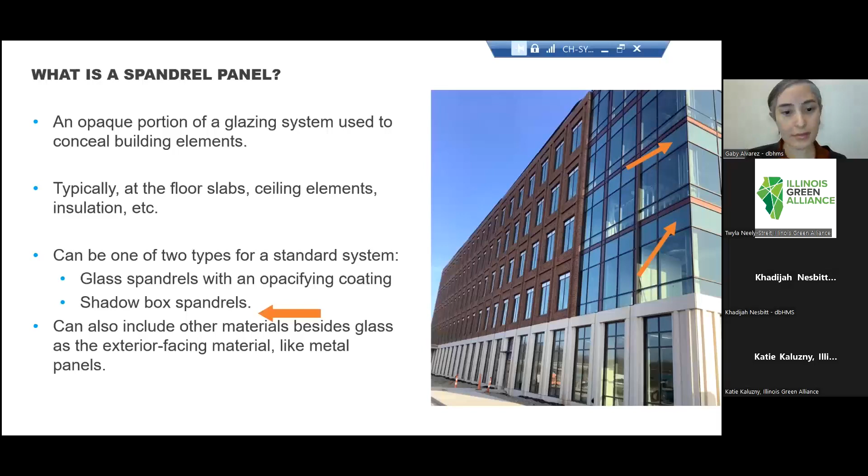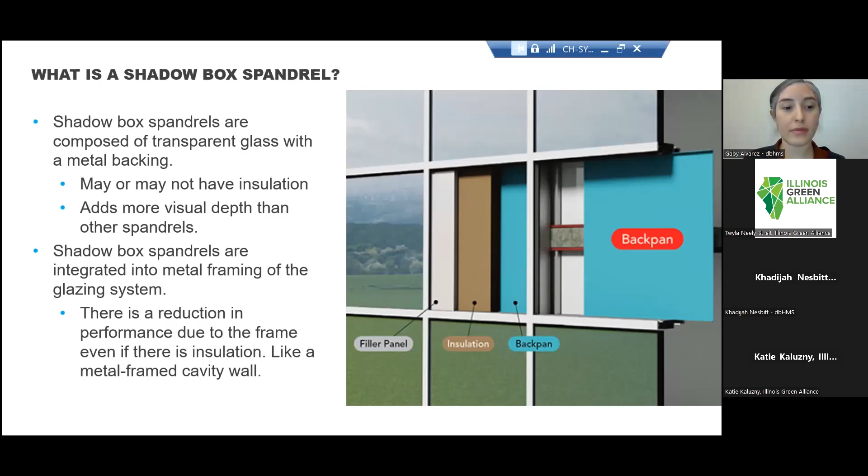In terms of a shadow box spandrel, shadow box spandrels are composed primarily of a transparent glass with a metal backing. They may or may not have insulation, and it allows more visual depth than other types of spandrel panels. Shadow box spandrels are integrated into the metal framing of the glazing system. So they have the same reduction of performance due to the frame, even if there's insulation, similar to a metal framed cavity wall.

And now we'll talk about what's the issue with spandrel panels and code compliance. First of all, we will be talking about the 2022 Chicago Energy Transformation Code for commercial buildings. So here in the image, you can see the different paths for code compliance, and we will be talking about ASHRAE 90.1 Energy Cost Budget. This is a performance path that uses simulation software to calculate the whole building annual energy cost. This we will call proposed, and that is relative to a simulated code minimum building that we will be calling

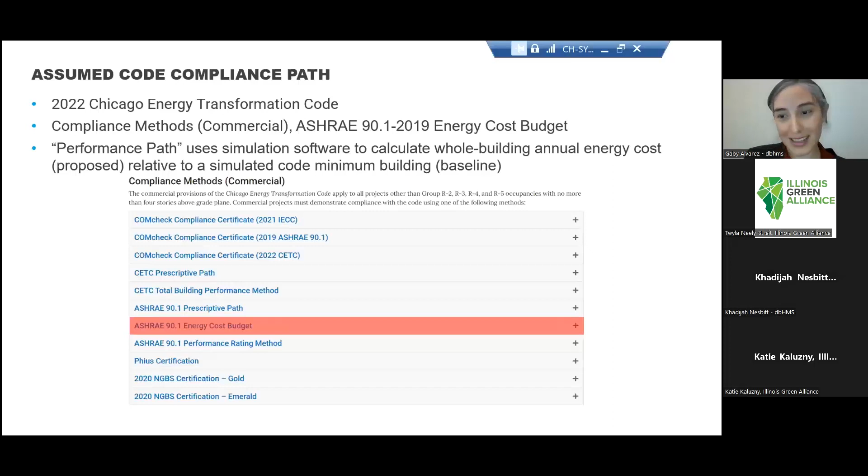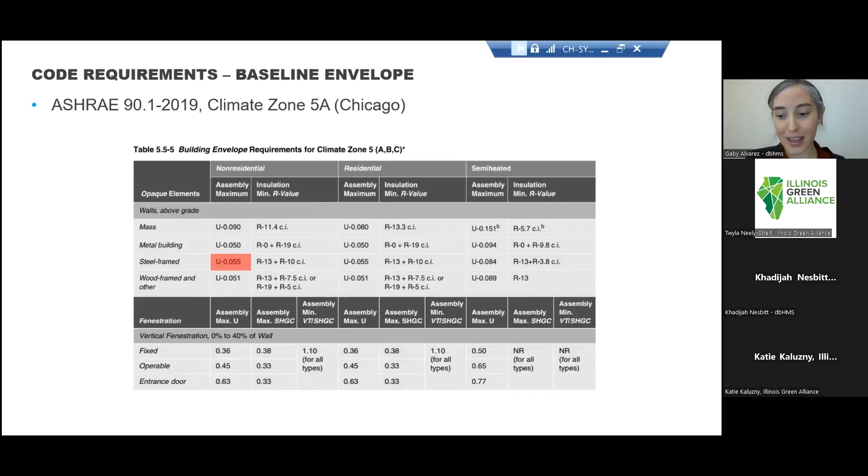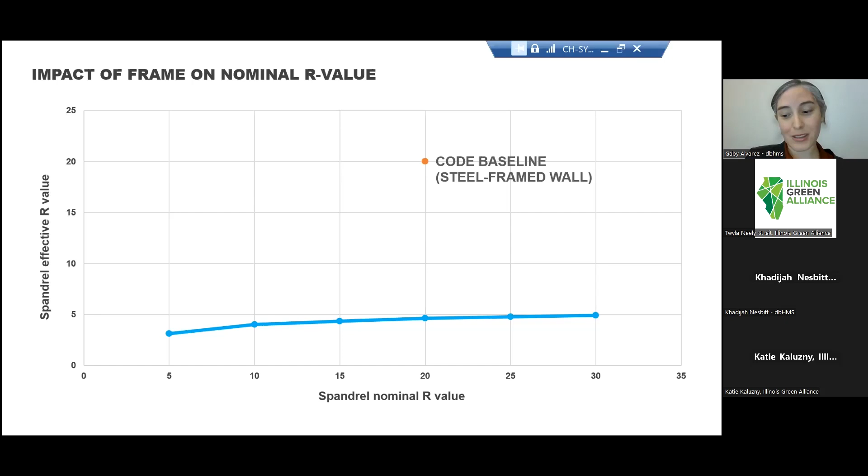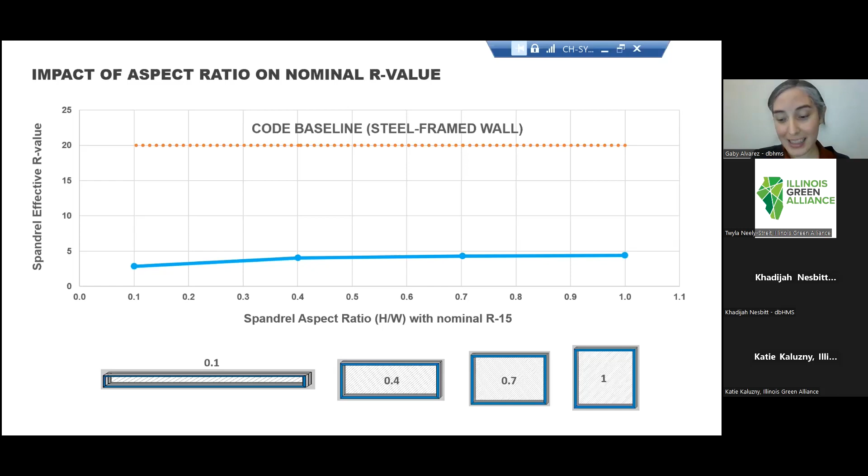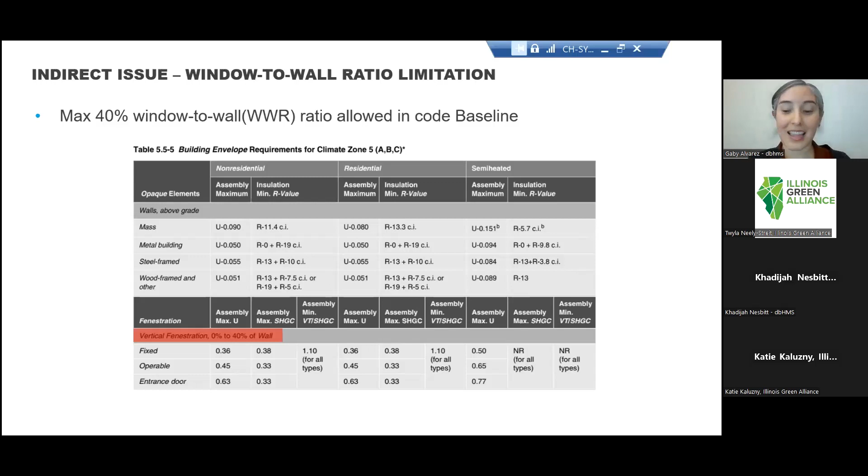Adding to all of this, there's also an indirect issue with the window to wall ratio. Here we can see that code allows up to a 40% window to wall ratio. The window to wall ratio is the portion of the building envelope that is constituted by windows. So if we have a window to wall ratio of 40, this is the part of the envelope that is made up of windows. And this is important because when we are doing curtain walls with spandrel panels, we probably have a window to wall ratio greater than 40%.

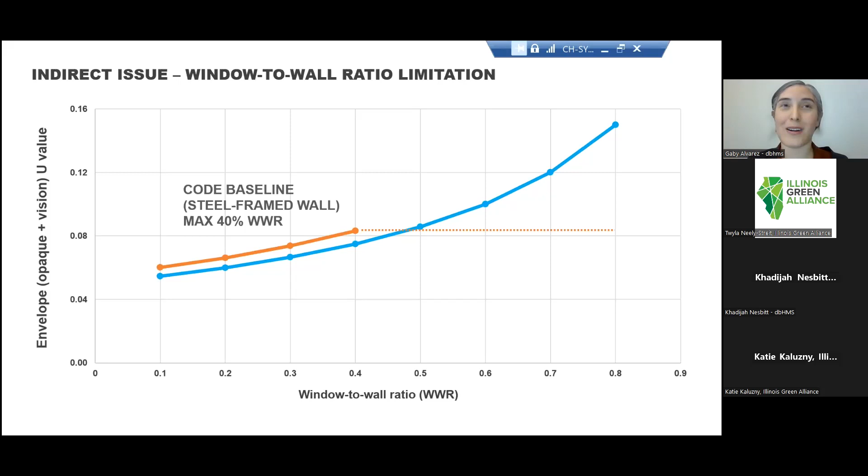This blue line represents our proposed building, and we could be increasing our window to wall ratio as we want in our building. And we'll see the code baseline is also increasing its window to wall ratio, but only up to 40%. On the y-axis, we have the envelope U value, the U value of the whole envelope, taking into account the opaque part and the vision. And we can see that even if we have better performance in our proposed, as we increase the window to wall ratio, we will have to compare it with the baseline and do better than the baseline. This is going to be hard when we are increasing the window to wall ratio even up to 80%. And these are all the challenges we have to face trying to comply.

Now we'll talk a little bit about what are the challenges in design that we've encountered.

This is an office building in Chicago, and this is a window submittal from the contractor, and we were having trouble defining the values. We were very lucky to have input from the contractor since the beginning, because we usually don't. This is something that at the very early stage of design, we don't know the impact the spandrel panel will have on our building. So even though we had this input...

I'll explain a little bit of this chart. We have the area of the vision and the area of the spandrel, and we have a base system, and then we have this same base system but adding 3 inches of continuous insulation. So we have the same area, this is for a curtain wall, so we have the vision and the spandrel and the overall, and then we have the U factor for the vision, the spandrel, and the overall.

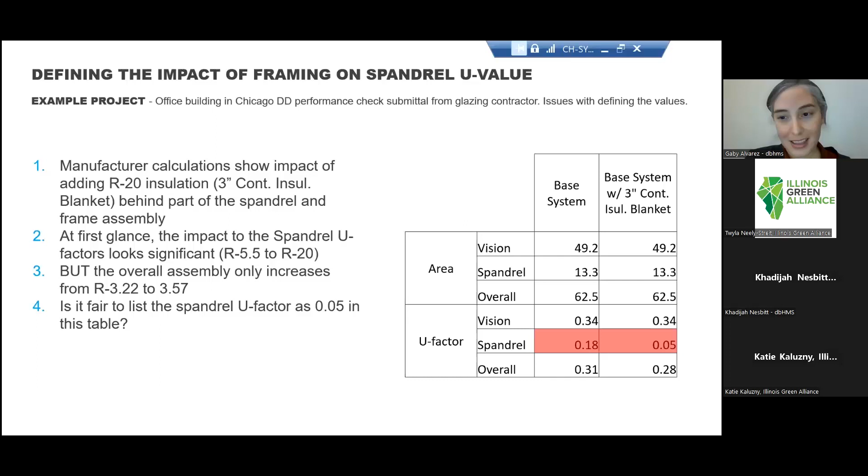We also wanted to talk about another project, totally different, and this is another point we wanted to make. This is a mixed use development, and we wanted to show the impact of the curtain wall system using the performance path, and the impact it has on the whole energy model. This is the whole building.

I'll explain a little bit of this graph because I know it has so many things in it. The second bar, on the left, is our baseline, and we're comparing the energy cost budget for the whole building. The red dotted line is our baseline - we have to do better than this. All the other bars are our proposed building, but we're simulating and changing some properties of the envelope.

This is also a building that had a lot of curtain wall, so a lot of windows. What we can change is the window to wall ratio, the solar heat gain coefficient, and the U value. We did all of these options, and we could see that overall, we are performing better than the baseline, performing better than code. All these colors are the different components of the building - we have cooling, lighting, heating. But at the end, we're passing code because we can take into account the whole building.

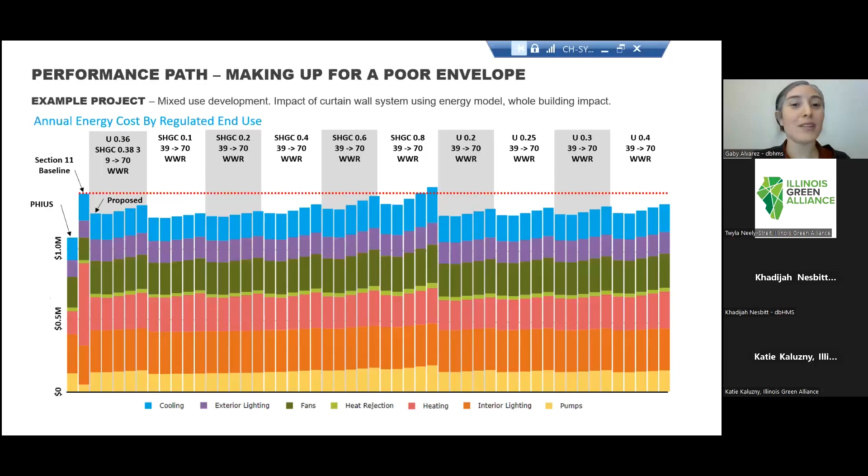But what happens if we take a closer look at how our building is performing, how our envelope is even performing? In this graph, you'll see the same baseline at the left, the second bar, and the different runs are the same. We have a dotted line on the positive and another on the negative. The positive is heat addition, and the negative is heat removal.

So at the end, taking a closer look, all these proposed options are even worse than baseline when we look at the loads on the envelope and the building. We're looking at equipment, infiltration, lights, people, and the loads from the envelope and the windows. We could see that most of it is doing worse in the envelope.

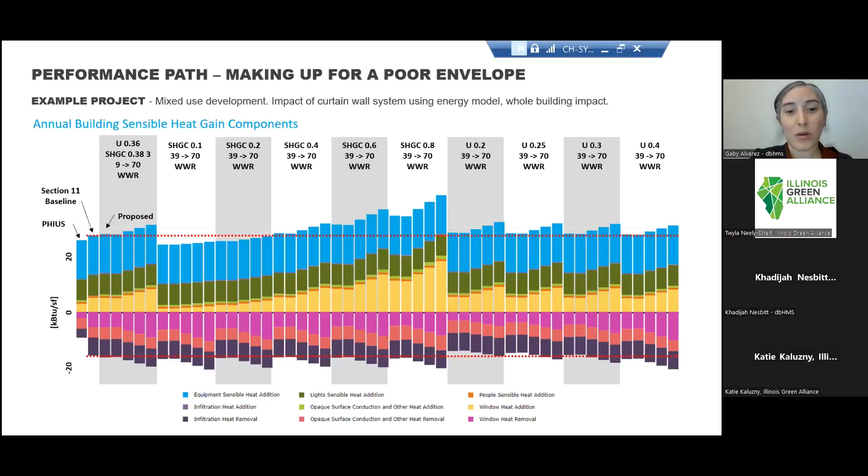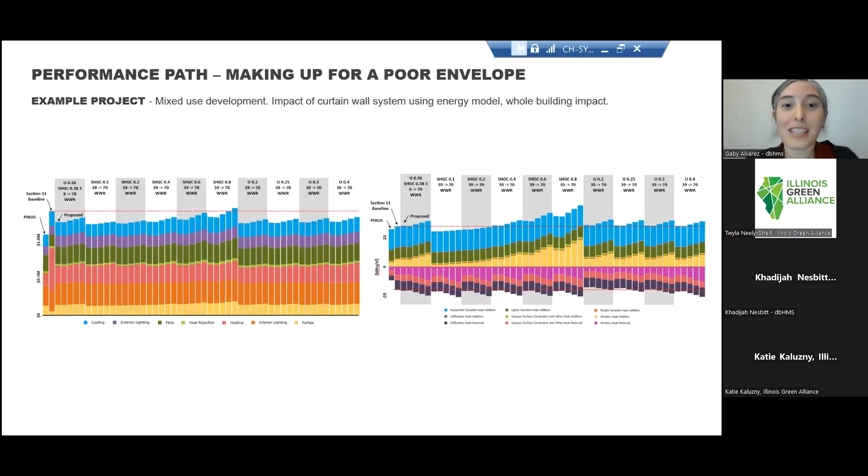So at the end, we wanted to say, okay, we're passing code, that's good, and we have great systems. But do we want to take a closer look at our envelopes, at what they're doing to the performance of the building? Really take a look at it, knowing that we can do better than what we are doing.

So we were asking the question: when you isolate and just look at the envelope performance, what happens, what can we do, and how does this impact the overall project?

We start looking at some of the design impacts for spandrel panels during construction. The idea is to get the optimal performance out of the spandrel panels, highlighting the struggles of getting that R20 that would be necessary. How the spandrel panels are designed and installed is key. If we want them to perform as well as they can, we need to make sure we're installing and designing them properly.

Some of the issues we're trying to prevent start with condensation. When it comes to spandrel panels, we get condensation when warm air bypasses the back pan of the spandrel panel and enters the shadow box. Then that interior glass surface reaches the dew point and causes condensation.

The condensation will be visible on the exterior, but it can also cause damage and staining, especially if we have issues with weakening seals, moisture getting in between each surface of the insulating glazing unit. Sometimes this moisture that gets into our spandrel panels on the interior, we see it and think there's a leak somewhere in the installation or the whole system, when really it's the condensation produced from the spandrel panels or the curtain wall system itself.

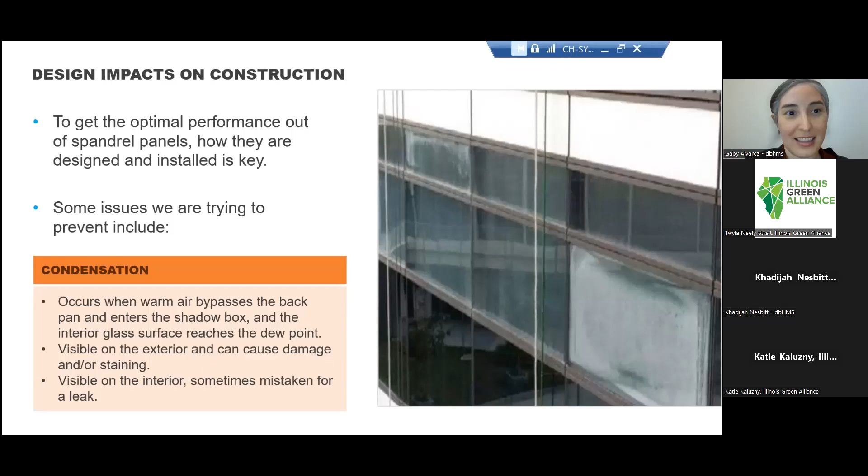Another thing that we're looking at are hotspots.

Uneven heat distribution across the glass can create uneven stress distribution, giving us hotspots. Where we have these uneven stresses, it can cause glass breakage and damage to our coatings, such as low E coatings. There are also pressure and temperature differential issues handled by the curtain wall manufacturer and glazing supplier that do impact the system and need to be considered when developing our spandrel panels.

In general, when we're doing construction, there's going to be debris, dust, materials, and spills that happen during construction projects, and these can contaminate or accumulate on the interior spandrel surface. Once the building is getting ready to be turned over and we're trying to button everything up for substantial completion, we're seeing all this construction dirt on the interior of our spandrel panel, and now it's visible on the exterior. These chemicals can damage the glass and be difficult to clean without causing further damage. This creates an aesthetic concern.

Because of how the spandrel panels are installed, you have glazing lubricants that can be left behind in the spandrel panel that are not properly removed and leave deposits. Any sealants or paints within the shadow box contain volatiles that can be released because of the solar gain that happens within the spandrel panels. It's extremely warm in there, and it can exceed 140 to 160 degrees Fahrenheit. So these volatiles can condense on the glass and cause additional damage and aesthetic issues.

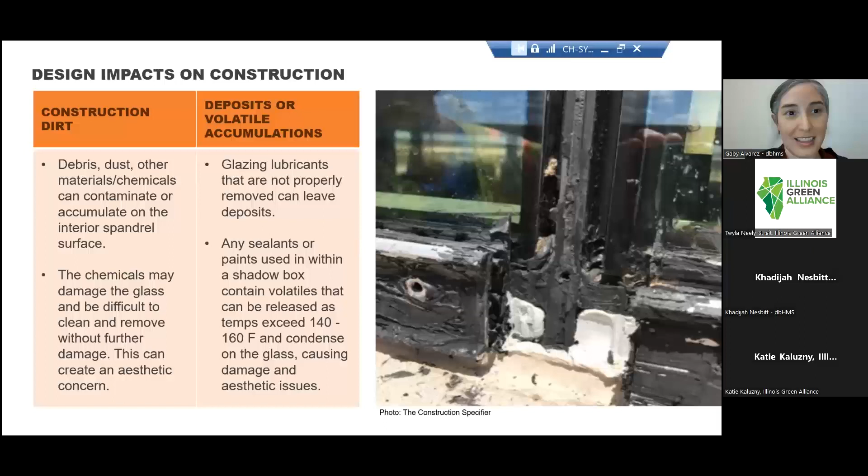There's a lot of different factors we have to consider with spandrel panels, especially because of how they're constructed, and we need to make considerations prior to and during the design phase, and then also once we're out on the construction site.

Some of these items we're concerned about can be addressed during the design phase. There will be spandrel panels, shadow box spandrels, called out in the design, but they're not shown as being sealed vapor tight. Having these notes in your drawings and specifications, and pinpointing that importance when they're installing the spandrel panels, is one way to help address these from the design side.

There's also a way to design shadow boxes with vented air cavities to prevent condensation from occurring within the shadow box. When it comes to the glazing, use heat strengthened glass for the exterior light of the insulating glazing unit, and tempered glass for the interior light to reduce breakage due to thermal stress. The overall makeup of the insulating glazing unit, the spandrel, and the installation on site all have an impact on the performance of the spandrel. It's all tied together in order for us to get a system that works properly for the life of the building.

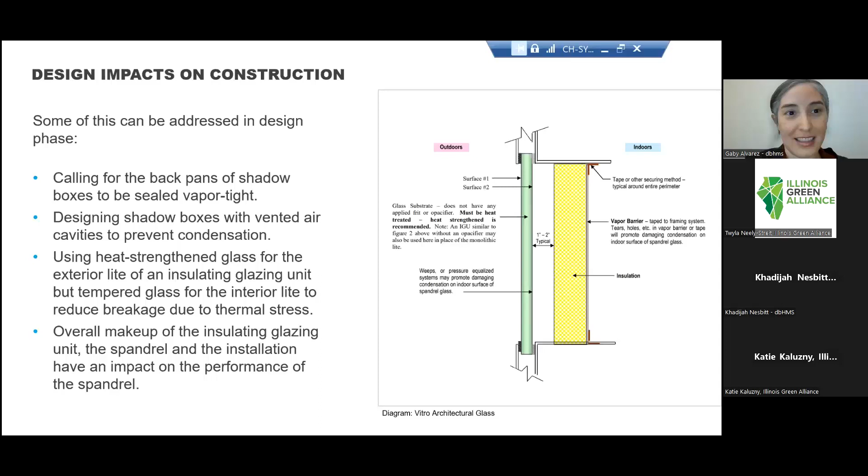Shadow boxes also need to be sealed properly to maintain the air and vapor control layers. They're part of the primary air and vapor control areas of the building, so we have to treat them in that same exact way and make sure we're sealing them properly.

A lot of times, the insulation used for spandrel panels is foil-back insulation, and it's taped and sealed at the back panel on the back side of the spandrel panel. How these are installed is very important—there shouldn't be tears or rips that would allow warm air to bypass the metal back panel of the spandrel panel. We have to treat spandrel panels as part of the air and vapor control layers, just like we make it a serious issue to maintain continuity for the building and the enclosure in general. We want to include the spandrel panels in that and not consider them as separate or isolated.

I'll say that this detail you see here to the right is an anchored detail, but there will also have to be considerations for any spandrel panels at moving conditions. So the design has to take into account any movement as well. It's not a one size fits all—of course, everything is project specific, but we have to make different considerations as it relates to maintaining the air vapor barrier control layers, especially when I have moving conditions.

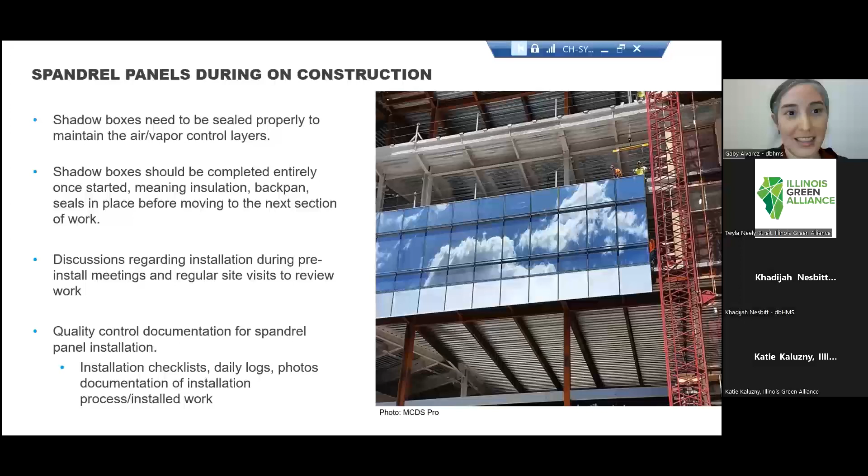Along with this, regular site visits to review how the installation is taking place and what we're seeing, even before the building is finished, help catch any issues. Site visits are performed by the architects themselves, but also by building enclosure commissioning providers and building enclosure consultants, having regular site visits to see the progression of installation, making sure it's matching the contract documents and calling out issues, as another way to combat some of the challenges we have with spandrel panels during construction.

And now, what are some solutions? First of all, be very, very clear.

Be very clear about the need to account for the frame. This is, I feel, very important. Spandrel panels have frames, and we have to take them into account in our calculations.

Also, a high recommendation is to follow the NFRC 100 and the NFRC simulation manual. I'm not an expert on this, but we do have experts at our firm, and there are many experts in the field. Let's call on them, let's bring them on, let's have them help us find the correct value for our spandrel panels.

Also, underscore the impact of the window-to-wall ratio on performance. Spandrel panels are usually part of a curtain wall system, and increasing the window-to-wall ratio of our buildings has a high impact on our performance when we look closer at it.

Also, call out the assumptions in any target value shared with the client and the design team. What are the assumptions we are taking? Where are these values taken from? And very importantly, having these conversations gets us closer to a solution.

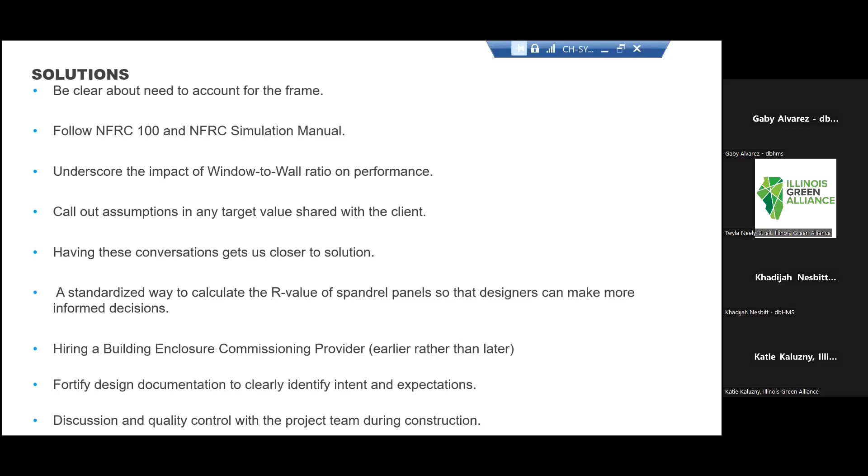I can speak to these, but also to add, having these conversations gets us closer to a solution. The point of the presentation is not to say there's a 100% solution currently. It's that this is something we're talking about, that has become a difficulty factor. The challenges have been known, but a lot of times because we can get the building to fall under code, or get the building to work and move forward with the project, we don't get a chance to stop and really look at what we can do to calculate the value of spandrel panels, and really understand the impact that an insulated or non-insulated spandrel panel will have on the building.

So that's really just to add to what she's already said about the design. This process of going through and figuring out how we can better approach this is what starting these conversations will help us do, because there's not a set answer and we don't have all the calculators established yet. But the more we talk about it being an issue, the more we can move toward that, instead of just pushing through and saying it's fine because we're still able to move forward on projects.

But another thing is, from the construction side, hiring a building enclosure commissioning provider earlier rather than later. A lot of people think commissioning providers just come at the end to see how the work is installed. But a commissioning provider is really there for the life of the building, from start until end, and even after substantial completion and turnover.

Having a chance to have a commissioning provider that can help provide recommendations, suggestions, and point things out, and be a second pair of eyes for the project team during your design phase, during your specifications, and during the drawing phases, to construction document phases, to be able to kind of highlight and start these discussions, and also help to articulate some of the challenges and the why we need to be paying attention to these items.

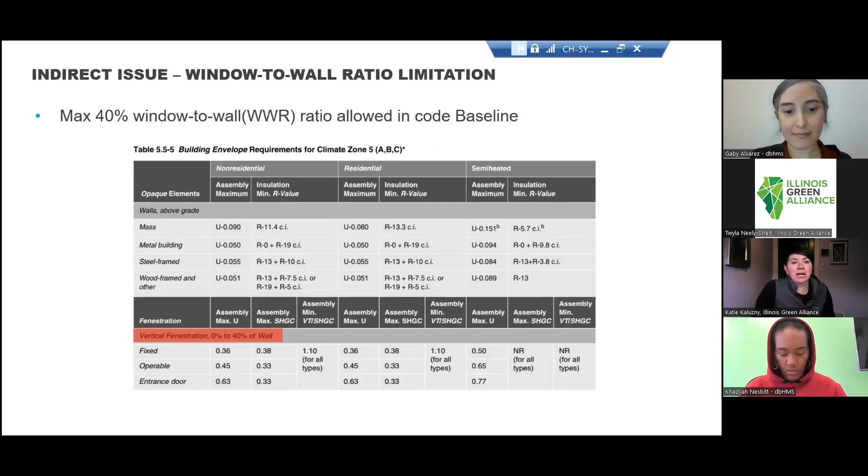Stan, if you have a follow-up to that question, feel free to add it to the chat or to the Q&A, and we'll make sure that we dig into that further if you need more. I have a question from Lauren, a couple actually. One asking about the window to wall ratio plot. So if you want to go back to that slide too, what do the orange and blue lines represent?

Yeah, thank you. I feel like maybe a little explanation here would have been better, but the blue line, that's our proposed. That's the building that we are designing, and the orange line, that's the baseline from code. When we're using this path of compliance, we have to do better than the baseline, and as we could have any window to wall ratio, we'll be comparing it to the same window to wall ratio in the baseline.

But when we get to 40%, if we go beyond 40% window to wall ratio for our building, we will always have to compare it against a 40% window to wall ratio. For the baseline, that's the maximum window to wall ratio. And this is where it hurts us trying to get better performance than code, because you see the blue line, the U value of the envelope will continue increasing, right? So this will be very hard to meet.

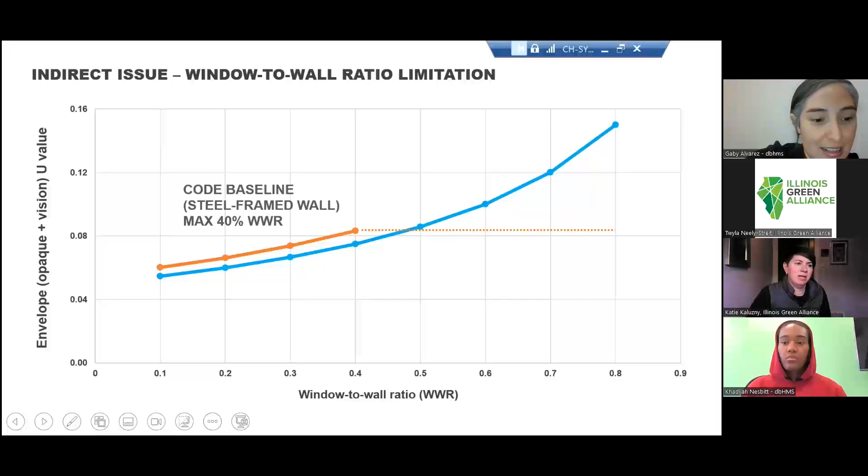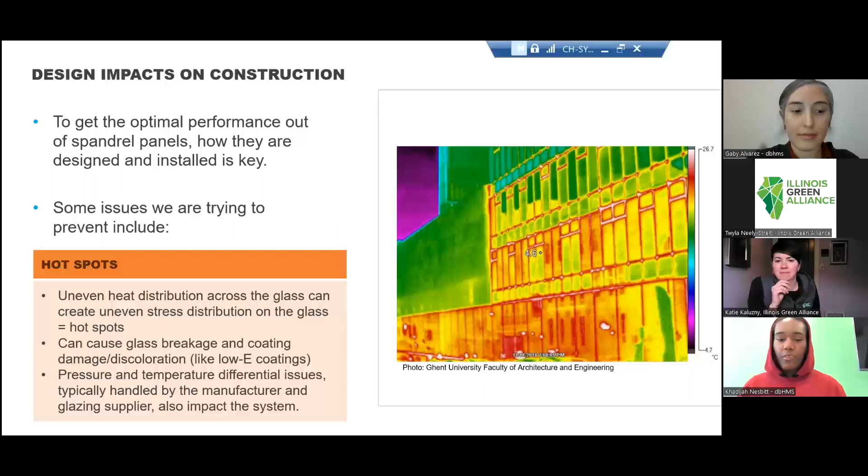So there was a question about if you've had a discussion or if there's time for a discussion on vented versus non-vented and foil versus metal back pans in those scenarios that you were sharing near the end of the presentation. So to speak to the foil versus, you can go back one, Gabby. Go back one. Yeah, foil. So what I'm talking about is the metal back pan that's in place. You have foil face insulation, and as part of that system, that foil acts as your vapor barrier. There's tape to go along with it to seal off the areas so that we have vapor control at the metal back pan.

So you'd still have a metal back pan, but to continue that vapor barrier, they might have a tape to go along with their foil back insulation. So you're still going to have your metal back pan at the back there, but depending on what insulation you have in there, you're going to have the accessories to go with it to create that vapor barrier and have it be continuous for the building. So it's not necessarily that your back pan would be foil. It's that you'd have your back pan, and you're sealing it off to continue your vapor barrier.

So if your insulation is foil back, you would have the tape to go with the insulation. If you have a different type of insulation, you'd have sealant joints at that metal back pan to seal off and create that vapor control. So it depends on what insulation you're using and what will be required to maintain that vapor control. I hope that answers that person's question. Feel free to write in the chat if you want to follow up on that one.

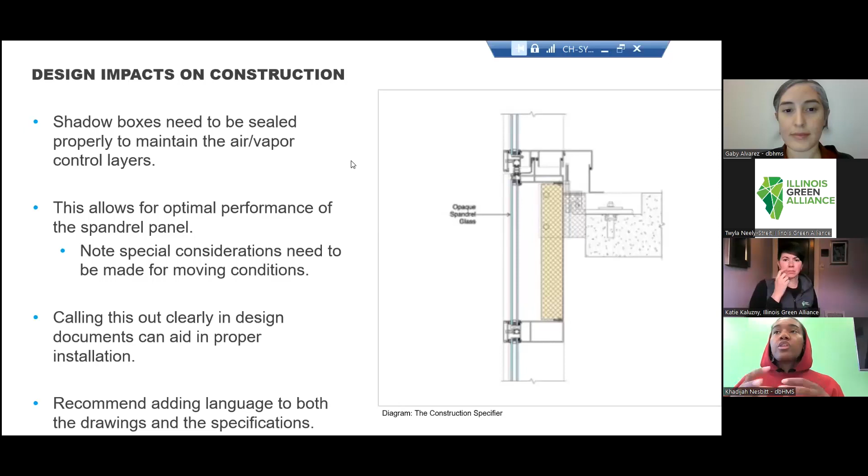So maybe you've already had a spandrel panel that had foil face backing and used it for a different project, and maybe it's unvented, and you left it alone and moved forward and it worked out fine, there were no issues. But then you try to copy and paste for each project, and we have to consider the changes in our systems and changes to our details that need to be made. So you have to use the right insulation, the right glazing, and have included in your design the right spandrel and right cavity in order to have a successful spandrel panel installation, right?

So it's not a one size fits all. What works for one might not work for another, just like how there are certain designs for buildings in warmer climates versus colder climates. So I can circle back with you, but it really comes down to: if we're going to have a vented cavity, what insulation are we going to use? If we're not going to have a vented cavity, how are we going to maintain the vapor barrier?

And if we're going to have a vapor barrier that has foil face and is using tape to maintain it, how are we going to protect it so it doesn't tear? So all these different things are factored in. It's like you have to ask a snowball effect question. This is what we have, this is how we're going to implement it.

Awesome, thank you. This one is kind of half question, half statement, so I'll read it and you can decide what to do with it. Are you aware of an addendum to 90.1 2019 that requires a baseline envelope performance factor before you can trade off mechanical equipment? Saying this should encourage investment in long-term quality envelopes. I think it would really encourage taking a better, closer look at the envelope before trading into any HVAC system.

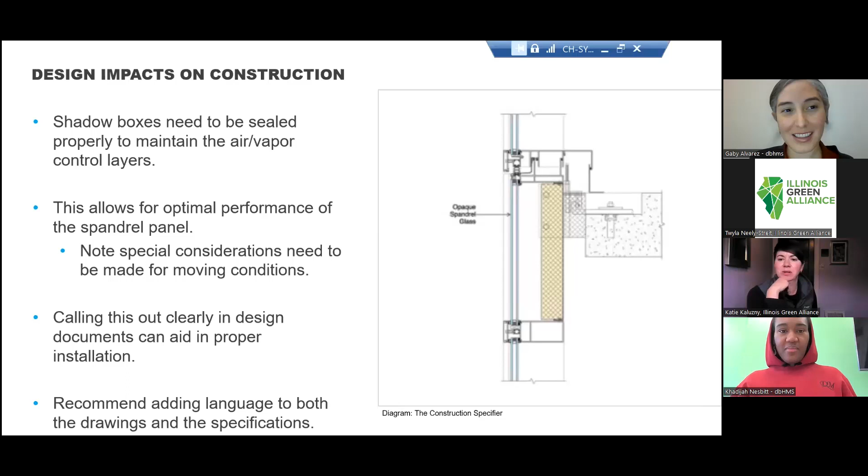Awesome. And then I just have a question, and I know we have to wrap up in a second, about how building code officials interpret the classification of the spandrel areas of curtain wall? Sorry, say that one more time. I was reading the other questions. Sure, no worries. How do building code officials interpret the classification of spandrel areas of curtain wall? So which parts are a spandrel, right? The opaque parts are spandrel and the vision is the glass. So is there any additional building code official interpretation of those items to be aware of? I think that's what the question's getting at.

I'll say there is not a specification of where the spandrel panels fall. I don't know all of the codes, but spandrel panels are usually taken into account as opaque surfaces, but sometimes it's not officially said that the spandrel panels are opaque in all of the codes. It's not usually stated.